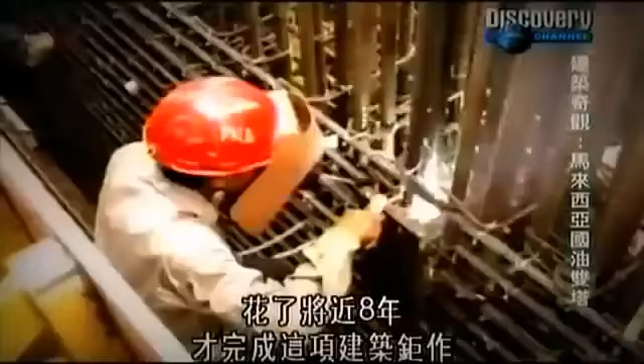Kuala Lumpur, capital of Malaysia, home to the world's tallest twin skyscrapers, the Petronas Towers, supported by the world's deepest foundation, spanned by the world's highest sky bridge. Over $1 billion worth of concrete, steel and glass went into their epic construction that took almost 8 years. The Petronas Towers are not only marvels of engineering, they're uniquely Malaysian icons for the 21st century.

Malaysia is a bustling melting pot of races and religions. 25 million Malays, Indians, Chinese, and other ethnicities live side by side in a predominantly Islamic society. Economic development between the 1980s and 90s has also put the country on the fast track to becoming one of Southeast Asia's tiger economies. One major beneficiary of this prosperous time is Malaysia's capital city, Kuala Lumpur, the heart of the country's industry and commerce.

During this period, the physical landscape of the city transformed. Numerous construction projects emerged, making Kuala Lumpur one of the most built-up capitals in the region. One of my abiding memories of Kuala Lumpur in the 1990s was just the number of cranes on the skyline. I've never seen a city, I think, with so much construction going on. But despite the construction boom, the cityscape still didn't have a focal point, a single identifiable landmark that the world would come to know.

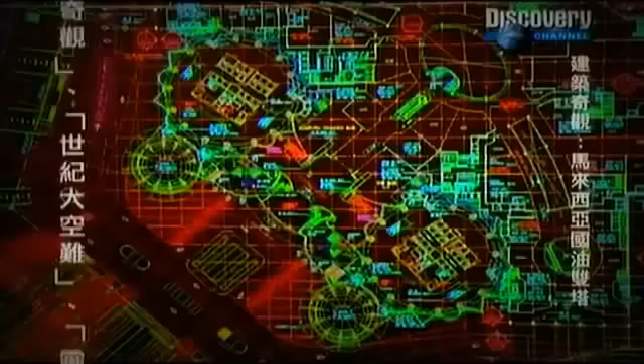The Petronas Towers were supposed to stand out as an ultra-modern icon, but they still had to retain their Malaysian identity and incorporate many of the nation's most identifiable cultural motifs into their design. With this brief in mind, a competition was launched worldwide for top architectural firms to submit design ideas. The winning entry eventually comes from Cesar Pelli, the world-renowned Argentinian architect.

I thought that the request that we connect the building with Malaysia was a very good request. And we explored quite thoroughly Malaysian traditions, Malaysian buildings, Malaysian crafts to capture the essence of what Malaysian means in a building. He took his inspiration from what he saw all around Kuala Lumpur. He reinterpreted the symmetrical patterns of classic Islamic architecture and integrated them into the design of the ultra-modern Twin Towers, as a result bridging the gap between technology and tradition.

A concept he used to further emphasize the towers' presence as a gateway. In the brief, we were requested to build 2 towers to form a gateway. Most of the other competitors did towers of varying sizes. But as I was trying to seek a symbolic quality in these towers, I quickly realized that having them in a pair, symmetrically placed, the symbolic value of those towers strongly increased.

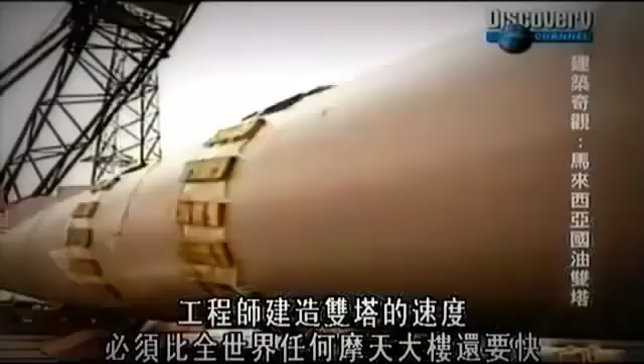With design decided upon, the engineering team was given a deadline of only 3 years to complete the construction of the Petronas towers. It was an ambitious timeline, and to achieve it, they'd have to build the towers faster than any skyscraper construction anywhere in the world. Even more challenging, the Malaysian builders had no prior experience constructing a super skyscraper.

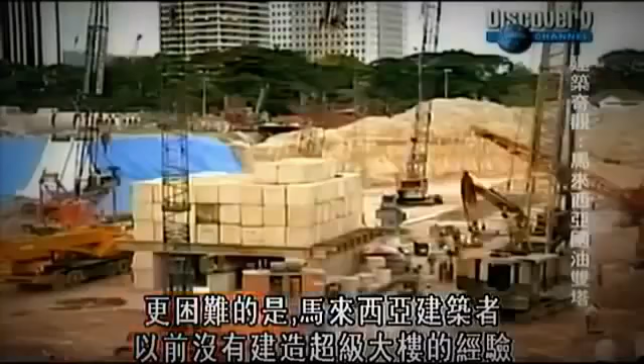To top it off, one more challenge was thrown to the design and engineering teams. The question was actually asked by then the Prime Minister, Tun Dr. Mahathir, what would make it the tallest building in the world? And Pelli thought about it and he said, you probably add another 10 meters or so. And we were struck by the point that that's all that it would take to make it the tallest building. And yes, okay, so make it so.

Suddenly, the Malaysians were not only faced with building a mega skyscraper for the first time, they were also about to construct the world's tallest buildings. Today, Malaysia's capital, Kuala Lumpur, is identified by an iconic landmark, the Petronas Towers. People from all over come to see the world's tallest twin skyscrapers.

But as much as the Petronas Towers stand out internationally, they're also able to blend into their Malaysian surroundings. This is the result of a strict brief given to Argentinian architect Cesar Pelli. Pelli's design adapts the geometric shapes of Islamic architecture found all around Kuala Lumpur and reinterprets classical Islamic patterns.

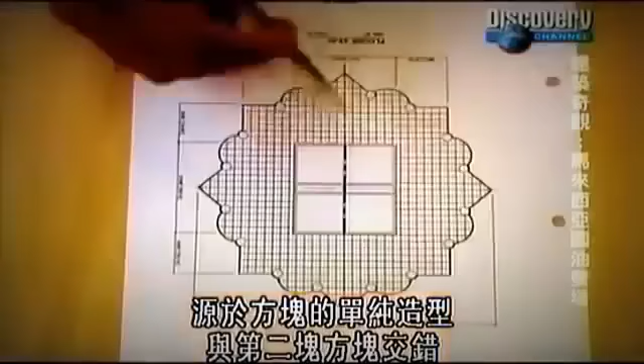Two interlocking squares form the 8-pointed star shape of the tower's floor plate, an important motif in Islamic art that symbolizes unity and strength. This interlocking of the squares has played very importantly in the form of the floor plate of the tower. Now it's based on a simple geometric form of a square, and interlocked with a second square, and this forms the basic geometric form of Islamic geometry.

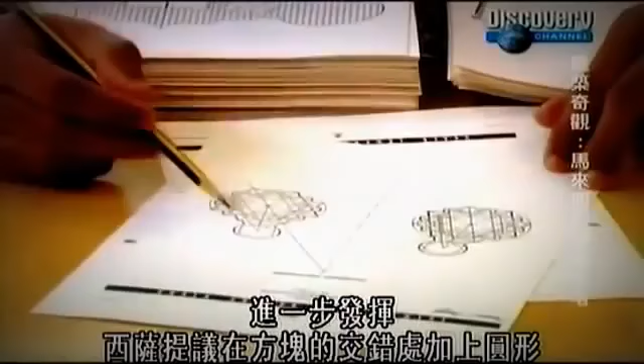But the floor plate design has a fundamental problem. Its interlocking squares limit the usable floor space in the building. A solution is quickly found. We slowly changed it by adding 8 semicircular lobes into a 16-lobed star. This is now a very efficient floor plate. To explain this further, Cesar proposed that at the intersections of these squares, he proposed circulars, and that's how the floor plate got projected out, and we have a sharp edge, a rounded edge, a sharp corner, a rounded corner.

The major design issues may have been resolved, but the bigger challenge remained. How do you build the tallest skyscrapers in the world? Back in the 1990s, the country's tallest building was a mere 60 stories. Constructing a skyscraper at a record-breaking 88 stories would be a tall order for Malaysia. There was a lack of experts with the depth of experience needed for a project of this scale.

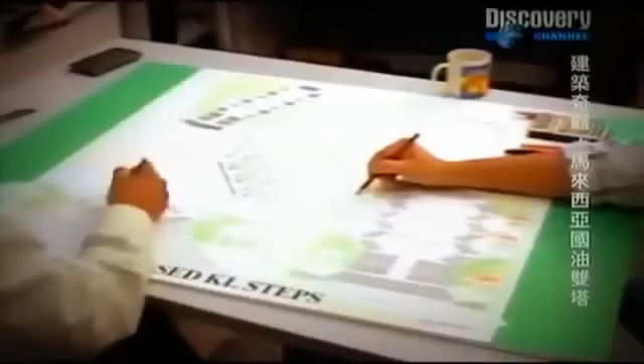A multinational team was quickly assembled, the likes of which had never been seen in Malaysia before. And this was very much a multinational effort. We had the English, we had the Scots, we had the Americans, we had the Canadians, we had the Japanese, we had the Koreans, we had the Chinese. You know, almost every single country was represented in one form or another. So it wasn't just a local effort.

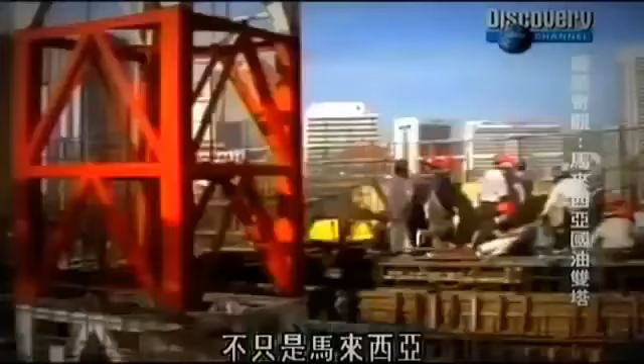The engineers' first task is to figure out what material to build the Petronas towers with. Skyscrapers are usually built with steel, but steel is not only an expensive material, it's something Malaysia is short of and also unfamiliar with. Now, if these towers were constructed in America or in Japan, they definitely would have been steel structures. To build the towers this tall, using mostly steel, would have blown the budget sky high. The solution was to go with the one material the Malaysian construction industry had in abundance: concrete.

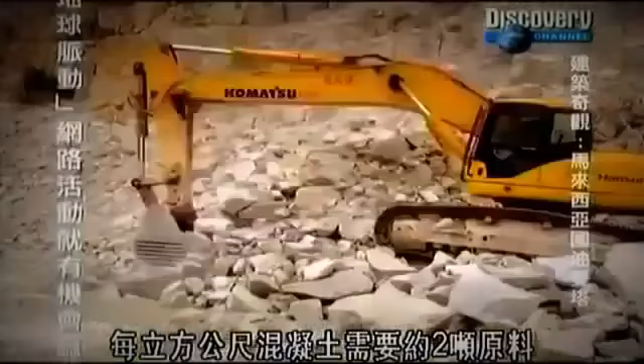Chris Landry is a concrete supplier who knows very well what the challenges are with using this material. The Twin Towers took approximately 180,000 metres of concrete. That's a fair volume of concrete in any structure. Every metre of concrete uses approximately 2 tonnes of material, and we were pouring 24 hours a day, so you can just imagine the volume of material that was going through the actual site.

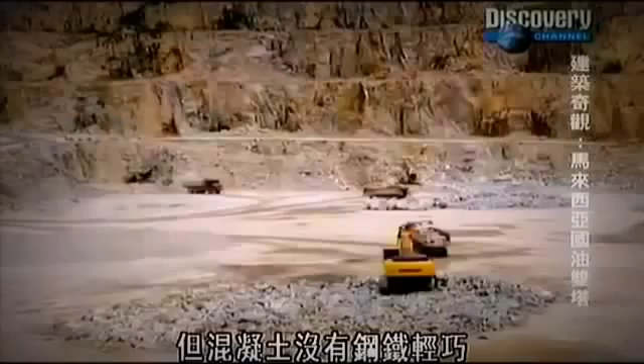Concrete, the world's most common construction material. A building made of it can resist strong winds and absorb twice as much vibration as that of steel. But concrete isn't as light as steel. Using it would make the Petronas towers the heaviest structure on Malaysian soil.

The combined weight of the towers reaches a staggering 600,000 metric tons, the equivalent of almost 4,000 jumbo jets. Needless to say, their tremendous weight also meant tremendous pressure on the ground beneath. We are talking about loads, mega loads. Here we have each tower's loads which are close to about 300,000 metric tons. So under such loads, with such mega building, we would need a huge and a large foundation to carry this building.

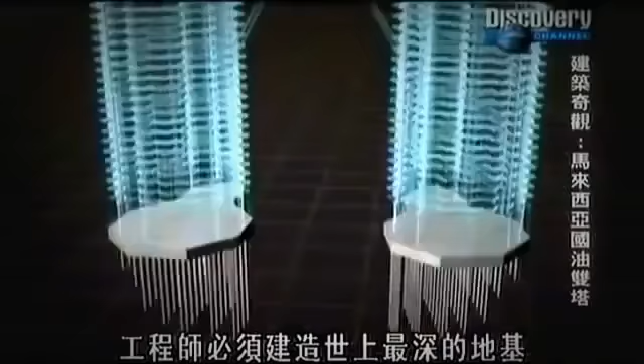To cope with the crushing pressure generated by the weight of the tallest towers in the world, engineers realized they'd have to plan and build the world's deepest foundation. Kuala Lumpur sits in the Klang Valley, a flat alluvial land surrounded by limestone hills. But while the valley's floor appears to be a smooth and unchallenging landscape, what's underneath can be as erratic as the limestone outcrops that encircle it. Building the world's deepest foundation on such unpredictable ground would be easier said than done.

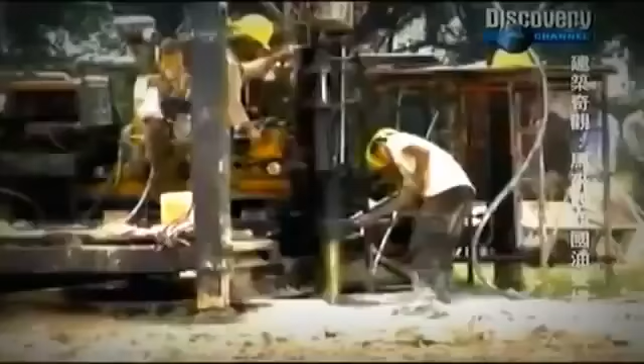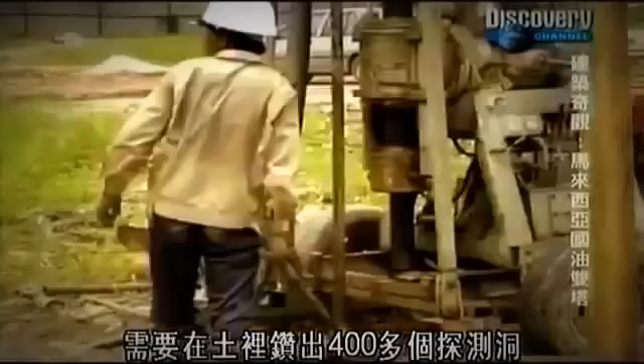Before building the massive foundation, the geotechnical profile of soil conditions at the site will have to be studied. This involves drilling over 400 exploratory boreholes into the earth. Stephen Tong was the structural engineer on the ground whose task was to examine the test results. To his dismay, his worst fears came true. The location sits on the edge of a cliff. Being a tower of this height, you know that the stresses underneath the soil are tremendous, and sitting on a cliff means that it causes tilt on the tower.

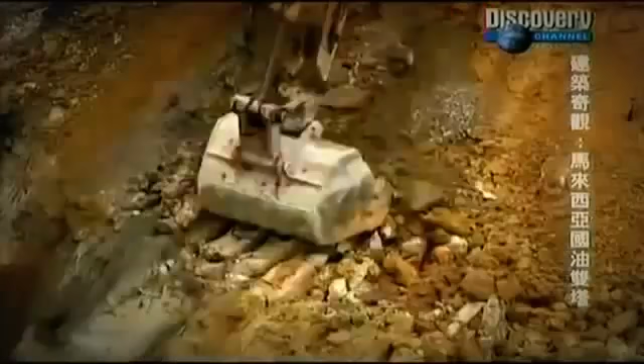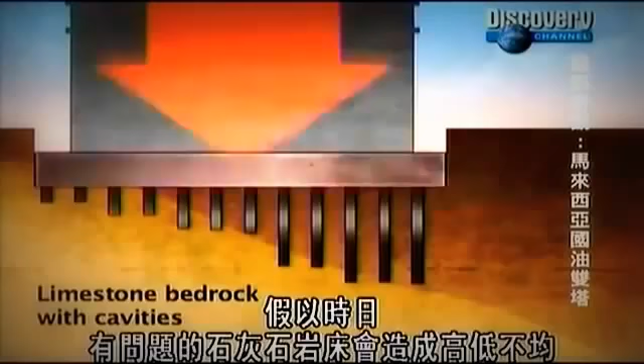The underground cliff that the towers are to sit on is limestone bedrock that starts shallow but slopes steeply downwards, more than 180 meters. Normally, limestone is good soil and it's rock. It provides a good end bearing for foundation. But in this case, the limestones have cavities in it, and that poses a soil problem. Over time, the problematic limestone bedrock can result in unevenness and cause the towers to tilt dangerously.

The engineers broaden their investigation around the site. They discover stable terrain 60 meters away from the original location. By moving the site to the new location, the towers avoid problematic bedrock and anchor firmly on stable soil. A massive concrete raft will now be constructed and laid across steel pilings, drilled some 125 meters into the ground. The foundation system of these buildings is actually a combination of pile raft foundation. Piling meaning deep columns penetrating into the soil, and the raft capping all these columns.

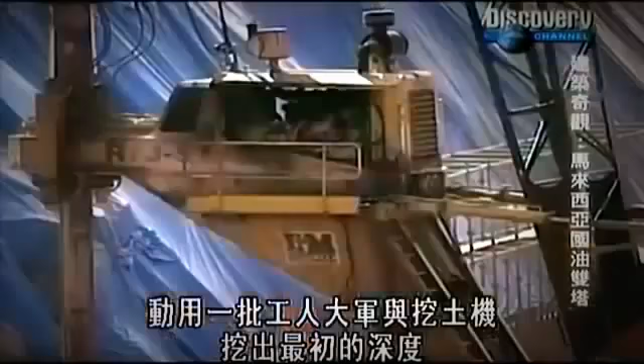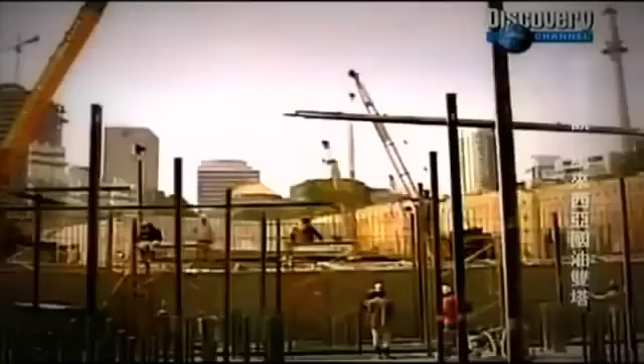To prepare the ground for the foundation, an army of builders and digging machines are brought in to excavate the initial depth. Even a large underground stream is no match for these diggers. Powerful water pumps are used to turn the stream into a mere puddle. Pilings are driven firmly into the ground to form the skeleton of the foundation. To fill the 4.5 meter thick foundation skeleton, over 13,000 cubic meters of concrete is required, the same volume as 5 Olympic-sized swimming pools.

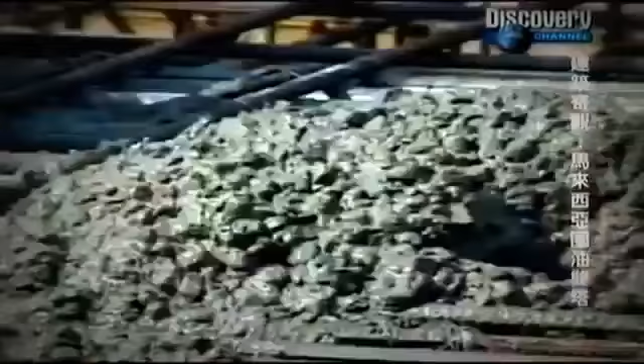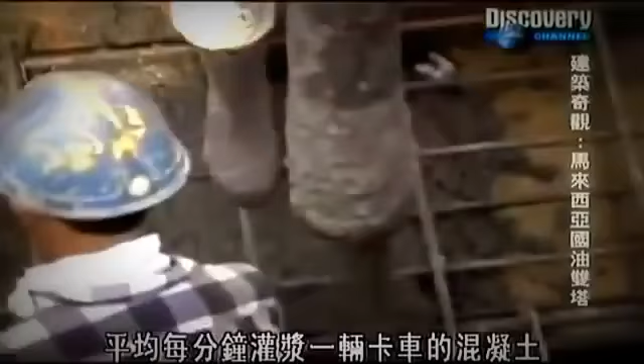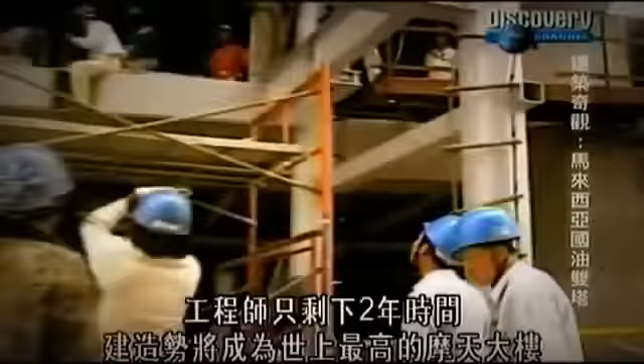The quick-drying nature of concrete meant that any delay could ruin the entire pour. So the team sets a punishing pace, pouring an average of 1 truckload of concrete every single minute. The pouring goes like clockwork from day to night. Not even a strong tropical storm can stop the men from continuing their work. After 1 year of planning and building, the massive foundation was finally ready to support the heavy loads of the Petronas towers. There's no time to waste. Engineers had just 2 years left to build the towers that would become the tallest skyscrapers in the world. There would be no room for mistakes.

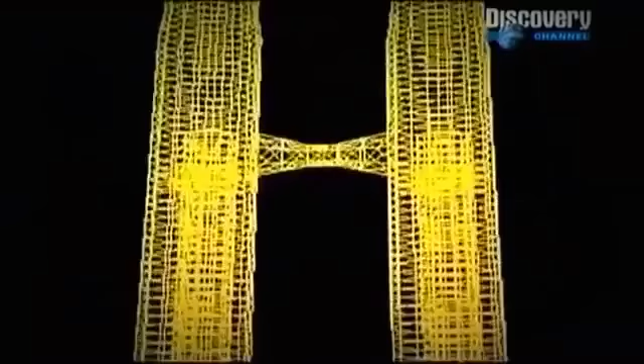Among the most distinctive features of the Petronas towers are the pinnacles. Twin spires that form the apex of Kuala Lumpur's famous landmark. They stand 452 meters above the Earth's surface, crowning the world's tallest twin towers. The idea of wanting to have the form of the building extend itself as much as you can into the sky, I think it's a basic human impulse. It's the desire, perhaps, of trying to connect our earthly beings with something higher in the sky.

Today, the Petronas towers provide an effortless view of the Kuala Lumpur landscape. But 10 years ago, taking the towers to their record-breaking height was not so easy.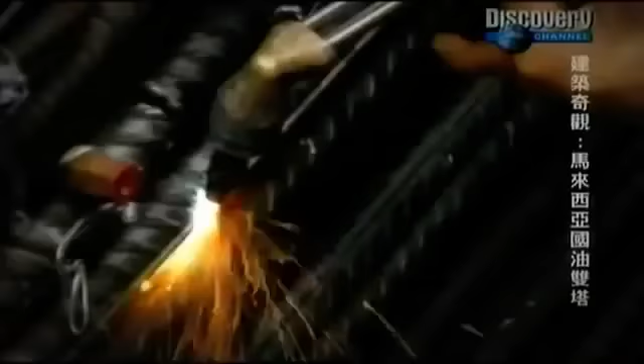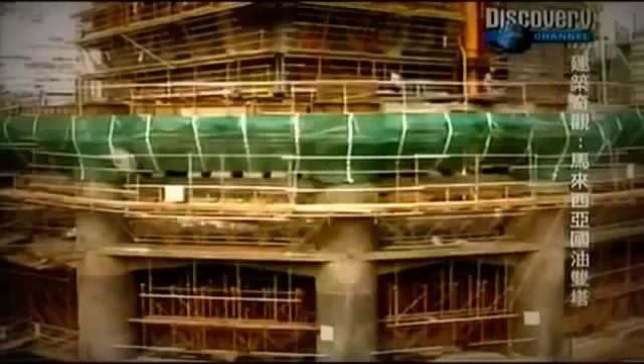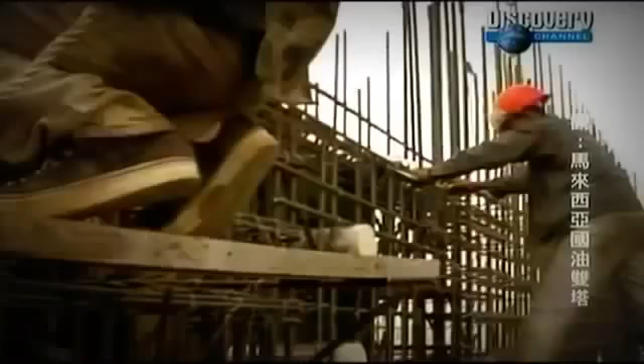During the construction of the towers, building each floor of the 88-story skyscraper was back-breaking work with no margin for error. As the Petronas towers began to take shape, engineers had to maintain the tower's verticality. This means keeping the building straight as it climbs to the top. A deviation of even millimeters can cause the skyscraper to lean.

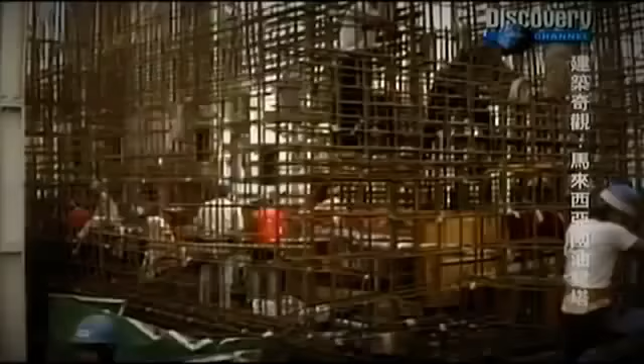Building crews were also in the race against time. They had only 2 years to complete the construction of both towers. To meet this tight deadline, planning managers realized they had to build one floor of the Petronas towers every 4 days. We were looking at a 4-day cycle per floor, and that is very, very fast. Even today, that is still among the highest rate of construction in any of the tall buildings anywhere around the world.

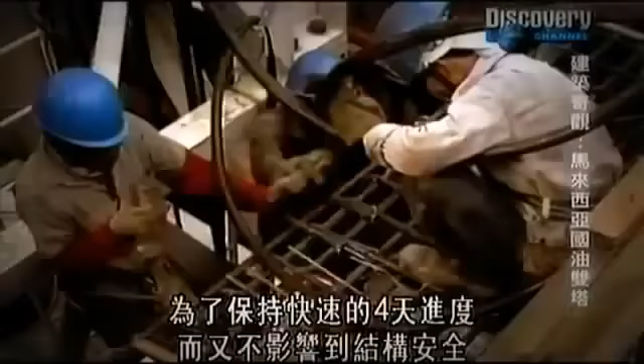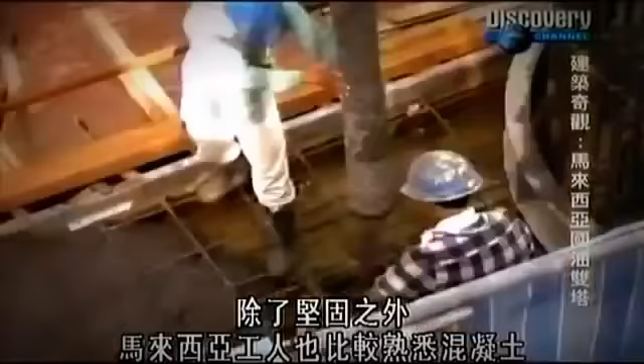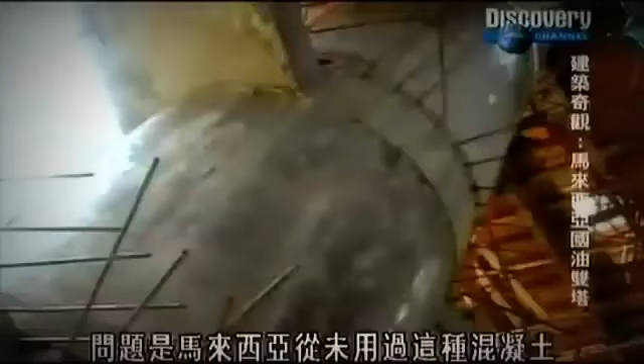To maintain the rapid 4-day cycle without compromising the integrity of the structure, engineers decide to use concrete. Besides its strength, builders in Malaysia were more familiar with concrete and worked faster with it. But using ordinary concrete to construct tower columns 452 meters high would result in massive column sizes and affect the building's design. So high-strength, more compact concrete was needed to streamline the columns. The problem was, this type of concrete had never been used in Malaysia before.

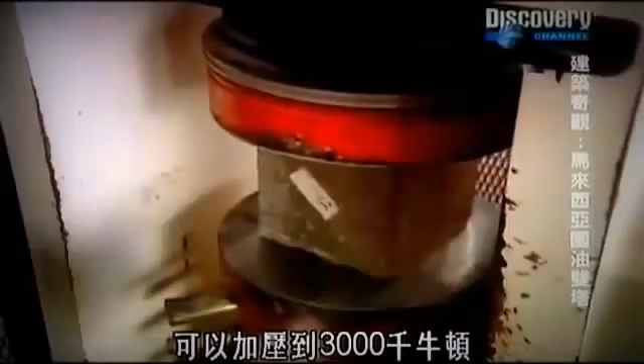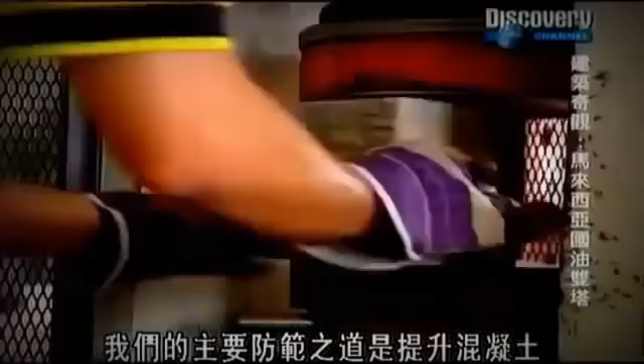Engineers brought in high-strength concrete experts, like Simon Jeffrey, to push the concrete mix to unprecedented strength levels. Here's our compression machine. This machine can compress up to 3,000 kilonewtons. When we're dealing with skyscrapers, we have zero margin for error. How we guard against it, our primary guard is we over-design our mix. For example, the grade 80 that we supplied to the towers, the average strength achieved was 101 megapascals. That's 25% stronger than what the engineers stipulated.

The grade 80 high-strength concrete is so strong, it's able to withstand the combined weight of 500 elephants for every square foot. The engineers were now not only able to build really fast, but also create a concrete monolith stronger than most skyscrapers. But the outer cosmetic beauty of a skyscraper is just as important as its inner strength.

Besides trying to build the tallest skyscrapers in the world, the Malaysians wanted to build one of the most beautiful buildings in the world. But beautifying giant skyscrapers is no easy task. It would involve using over 80,000 square meters of steel to add another unique feature to the towers. These are the only 2 towers in the world which are cladded in stainless steel, completely. The stainless steel is a beautiful material in the sense it captures light in different ways at different times of the day.

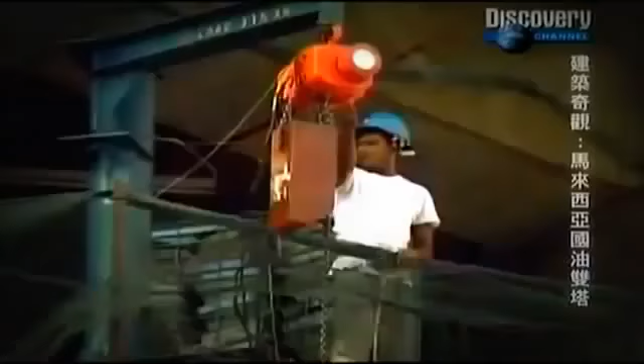The shimmering beauty of the Petronas towers today can be attributed to the efforts of hundreds of metal workers who clad her armor of stainless steel. In order to match the 4-day per floor cycle of tower building, they had to devise a special process that involved prefabricating a unique wall panel system. The man behind the metalworks company responsible for knocking these wall panels into shape is Mr. Cha T. In just 2 years, Cha T and his team would have had to cut and assemble a total of 33,000 panels, installing 120 of them into the towers each day.

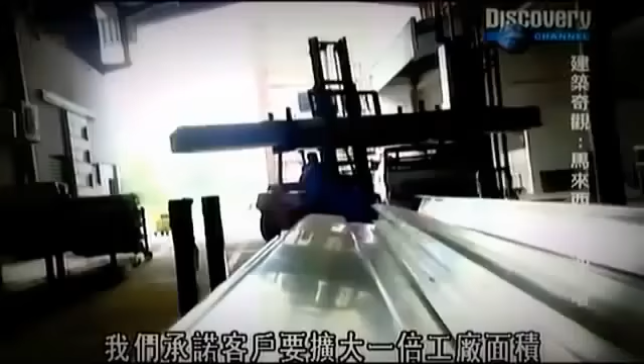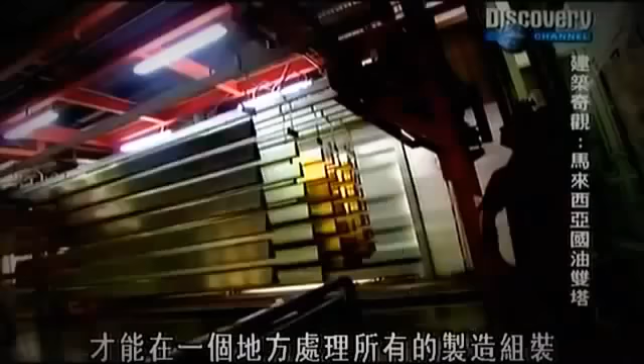When we got the contract in 1993, we have a factory area of about 75,000 square feet. This is our commitment to the client to expand our factory, to double it, so that we can cater all the manufacturing and assembling activities in one area. It was the largest amount of stainless steel that Cha T ever had to work with. He quickly realized that to cut the panels accurately in the given amount of time, he would need reinforcements.

This is the V-cut machine from Japan. A power cutter that combines the sharpness of a samurai sword with Japanese precision technology. We need the V-cut machine to V-cut all the corner, all the bend corner, you know, so to give you a very sharp look.

The steel claddings may owe their clean curves to the latest in Japanese technology, but the idea behind them stems from a more artistic source. They are a result of architect Cesar Pelli's plan to reflect the changing light of the Malaysian tropical climate in the tower's design. We wanted to capture some of the feeling of a tropical building, some of the sense of exuberance and the richer play of light and shadow, the kind of dappled light that you have in the rainforest.

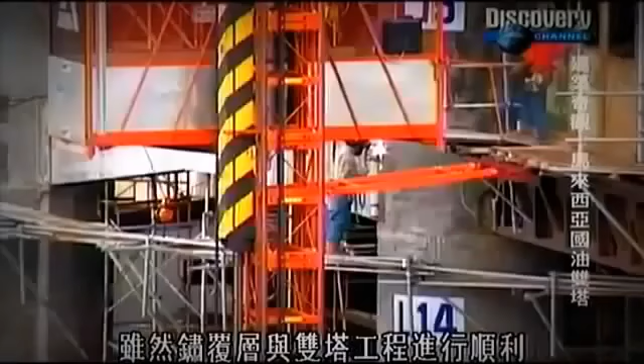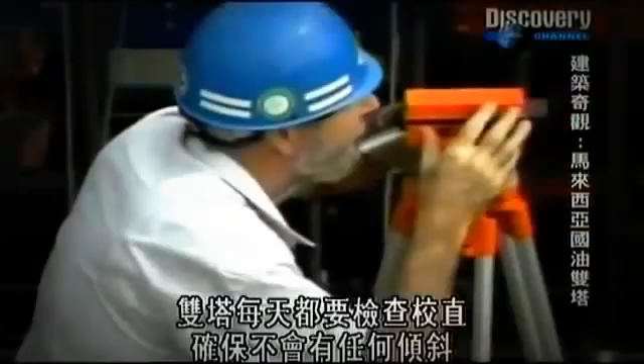Even though the steel cladding and tower construction are running smoothly, engineers still face the challenge of ensuring the building remains as straight as an arrow while going up. The alignment of the buildings is checked every day to ensure it doesn't sway from the direction of its upward climb. Everything seems to go smoothly, but as the towers reach the 40th floor, the engineers are struck with their worst nightmare.

One of the towers is discovered to be leaning a few millimeters off tangent, and no one understands why this is happening. This is a major cause for concern. Because to us, millimeters, if you don't correct the millimeters, could translate to centimeters and to meters. I was afraid. We have a tilting tower in KL. I was afraid of that. With the leaning tower now looking like a potential disaster, all work on the building stops until a solution can be found.

As general manager, P. Krishnasamy was in charge of monitoring progress reports from surveyors and engineers. I think at that time, because we didn't understand it, it became a bit of a scare for a lot of people, because we'd never been there. We then went to people who had built it before, at Sears in Chicago, and they picked it up very fast to tell us, this is what will happen and the reasons why that happened.

The solution the Malaysians discovered was to generate a stronger opposing lean to cancel out the current leaning problem. During construction, we would overcorrect the building in the opposite direction. We will build it such that if it were to lean in one direction, when we overcorrect it, end of the day, it comes to the correct verticality. Ironically, to fix a crooked skyscraper, engineers have to make the building equally crooked, but in the opposite direction. Fortunately, the deviation was small, and the correction required was minimum.

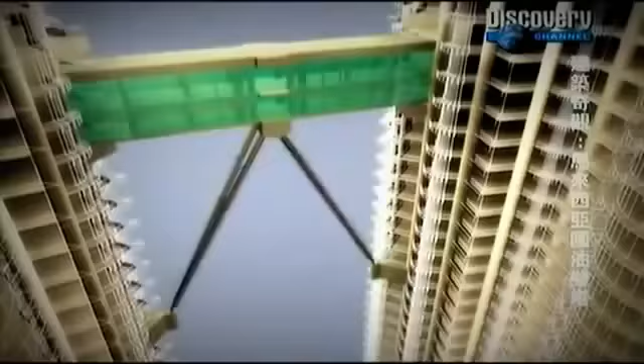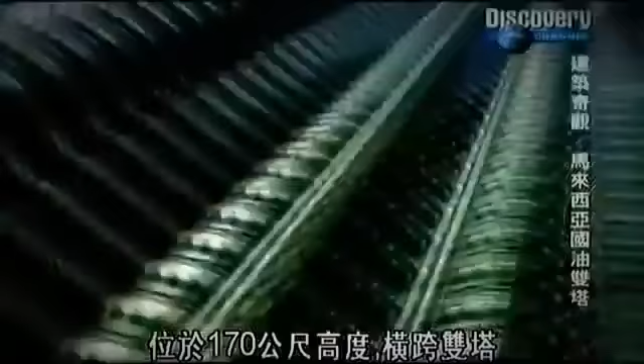Today, the sky bridge is the centerpiece of the national landmark and one of the main reasons why the Petronas towers are unique. The idea for the sky bridge started as an aesthetic, artistic intention with a symbolic meaning. Connecting them with a bridge made them more clearly into a portal to the infinite, a portal to the sky. Besides serving a symbolic purpose, the sky bridge also has a functional role.

Gentlemen, you're given 10 minutes on the bridge.

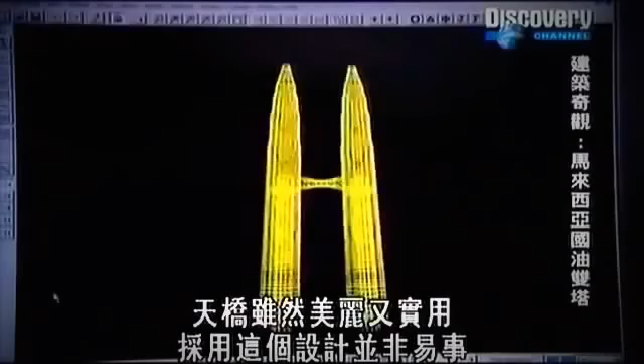It serves as a corridor connecting the two towers. To manage the flow of traffic, designers also made it a dual-level bridge. People can get from one building to the next at midway without having to travel down the length of the tallest towers in the world for the same purpose. Though the Sky Bridge brings with it form and functionality, incorporating it into the Petronas towers did not come easy. Even at the design phase, the bridge proved to be a major challenge.

The Sky Bridge design went through a number of stages of redesign. It, I think, went through 5 different stages of design. At the launch of the project, the Sky Bridge had a little bit of a spider web kind of a feel to it. The original design had a series of steel wires locking the bridge to the towers. This was based on the theory that they helped to create stability. But when structural engineers studied the design more closely, they discovered the theory was flawed.

We were faced with a problem here from a technical point of view, the movement. We know it is a fact that both towers could move differently. Now, when both towers move apart, we know that if we fix the bridge to the towers, there will be tearing forces. The original web-like design of the Sky Bridge had to be discarded. Designers and engineers then looked into other potential replacements before settling on a new plan. The solution was to float the bridge.

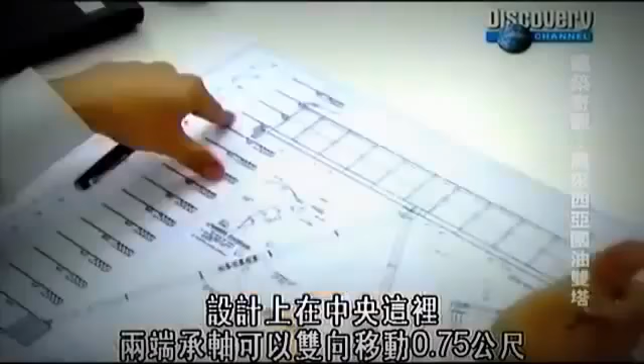It involved building an inverted V-shaped arch that supports the bridge in the center. 2 end bearings accommodate any movements caused by the natural tendency of the towers to sway. In fact, the design is that at each of these bearings, the bridge is allowed to move 3/4 of a meter in either direction of the center. That is what I meant by floating. It is not fixed.

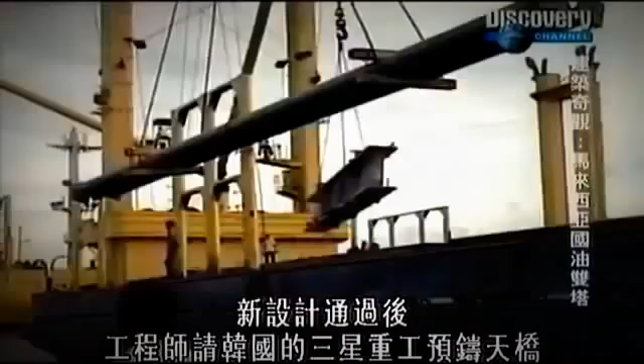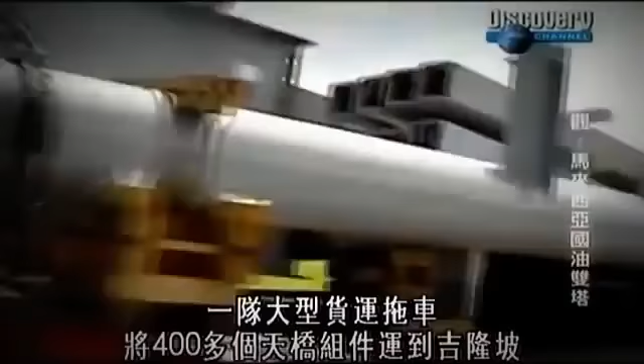With the new design approved, engineers had Korean steel experts, Samsung Heavy Industries, prefabricate the Sky Bridge and ship it over to Malaysia. It was important to make sure that every single element of the Sky Bridge had to be perfect. A convoy of large trailer trucks transport over 400 bridge parts through Kuala Lumpur. But this is nothing when compared to the bigger challenge that awaits them on site.

Raising the main parts of the Sky Bridge to more than 100 meters above ground and then assembling them in mid-air. Since it's going to be constructed in the mid-air, we can't afford to make any mistakes. If you have any slight mistakes, you can't do anything with it, you know. So you have to make sure that it's right the first time.

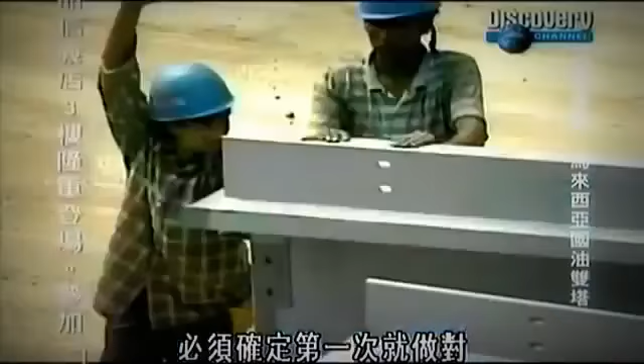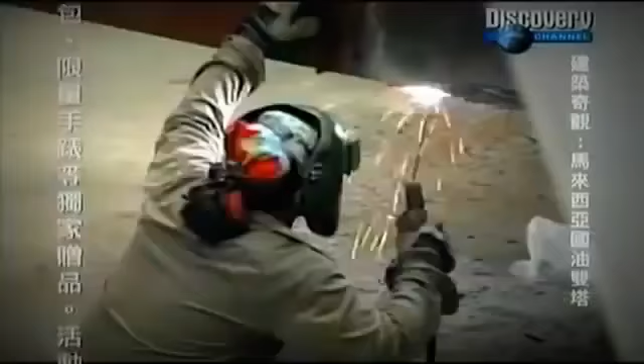On arrival, the bridge parts, weighing in at more than 400 tons, are carefully removed from the trucks. The Sky Bridge is reassembled into 5 sections, comprising the 2 40-meter-long legs, the 2 ends of the bridge, and its midsection. In no time, the lifting operation commences.

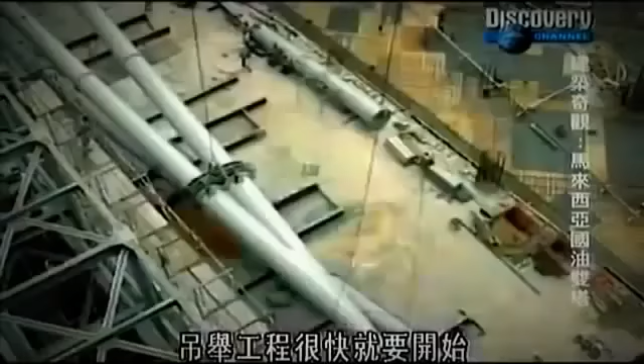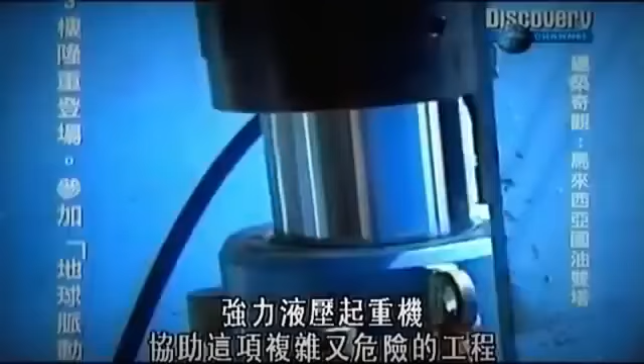The process begins with the lifting of the bridge's legs that each weigh 60 tons. Powerful hydraulic jacks help to ease a complex and dangerous operation. Each leg is slowly maneuvered into a vertical position over their permanent bearings at level 29 and secured. With this part of the process completed, lifting crews turn their attention to the bigger challenge of the operation.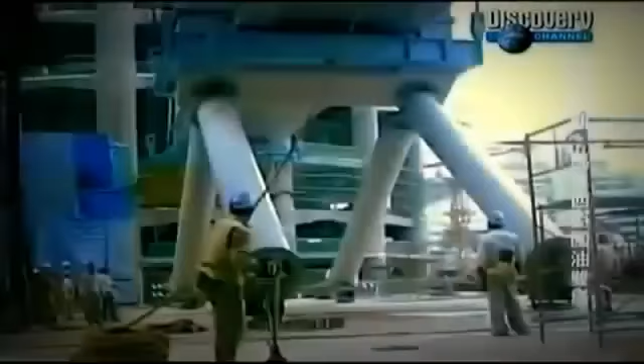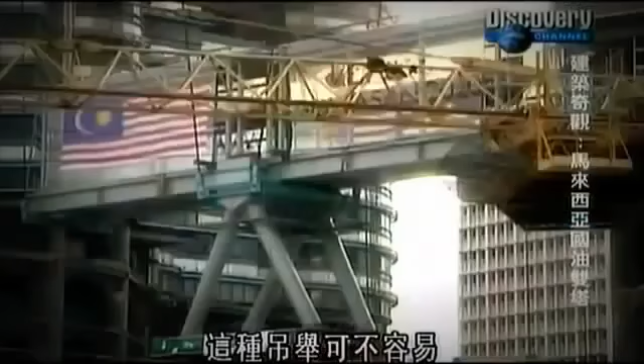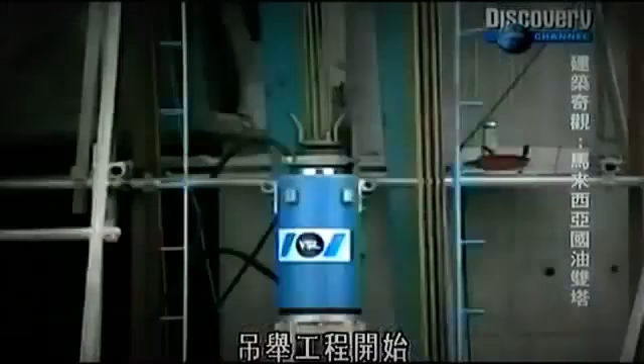Lifting the 325-ton bridge midsection. This will not be an easy climb. The lifting operation begins. The midsection makes the ascent slowly at 12 meters an hour. Engineers carefully observe each second of the process. In an operation that will take more than 30 hours to execute, anything can happen.

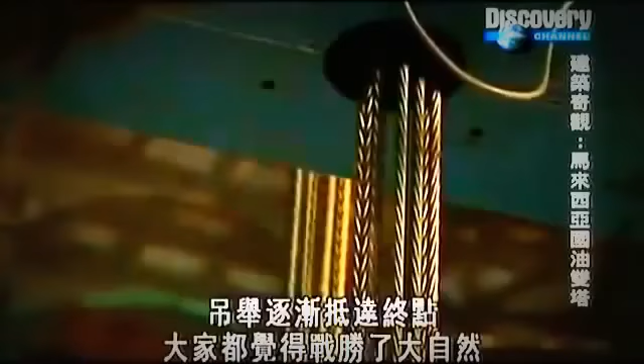Sure enough, it does. A tropical storm suddenly erupts over Kuala Lumpur. But there was no way the engineers could stop the bridge midway through its ascent. So the lifting continues. As the lifting draws closer to the end, everyone thinks they got the better of Mother Nature. Until the lifting mechanism of the bridge section stops without warning.

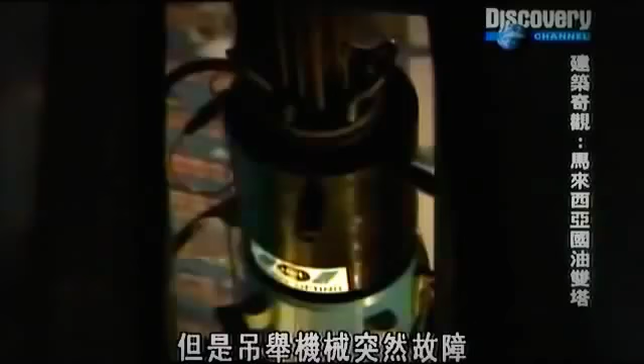What happened was the computers that were used to lift up the sky bridge got struck by lightning, and the whole process actually stops. And they had to actually repair it almost overnight. We can't leave the midsection dangling there, not knowing what's going to happen next. So I think everybody was actually praying. That was the sleepless nights. I used to sleep most of the time, but that was one time that I didn't sleep at night.

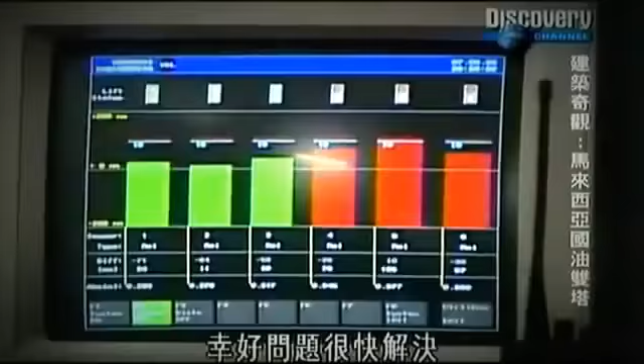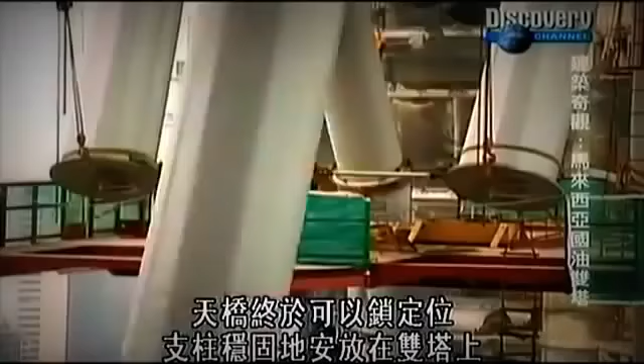To everyone's relief, the problem is quickly resolved, and the bridge continues its ascent to reach its intended height. After almost 3 days of painstaking lifting work, the bridge finally gets bolted into place, with its legs resting firmly on both towers. The goal of building the highest sky bridge in the world has finally been realized.

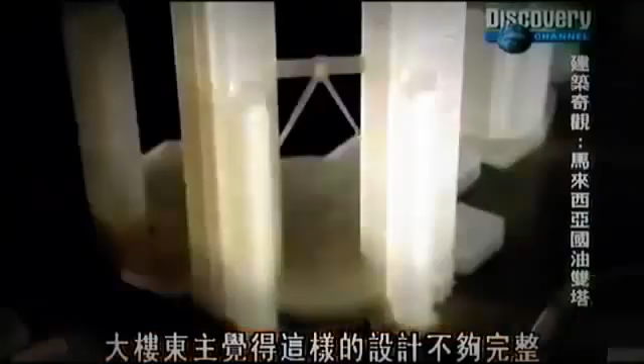With the sky bridge now in place, engineers turn their attention to another defining feature of the towers, the pinnacles. It's hard to believe that these elegant structures, so comfortably perched on the top of the tallest twin towers in the world, were never in the original plan of the buildings. In the original submission by Pelli, the roof or the top of the building was a flat roof. So it seemed abrupt. To the owners, it seemed an abrupt ending, or rather an abrupt crown to the building.

It seems incomplete. So Mr. Pelli was asked to come back with several options. It was a very difficult element to design. We had more alternatives for the pinnacles than for any other element of the tower. It was just how to capture the right quality, the right flavor for the pinnacles.

The design solution came, once again, from the earlier connection Pelli made with Islamic art and culture to create the look of the Petronas towers. This time, he looked closely at the curved beauty of the domes on mosques all over the city and decided to adapt their design for the tower's pinnacles. It's a very subtle intellectual relationship, but somehow it is felt, and people feel it, connect with it, and can sense that this is a form that connects with their culture, connects with Islam, connects with Malaysia.

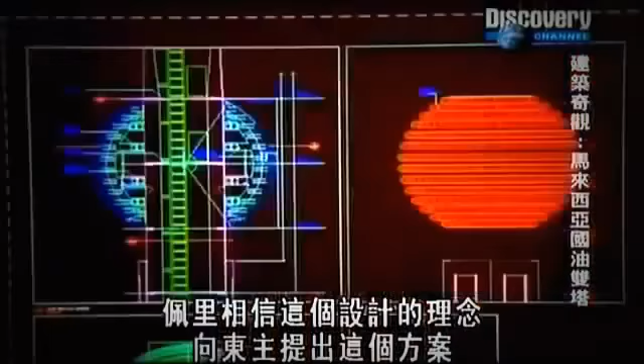Convinced by the reasoning behind this design, Pelli pitched the idea to the building's owners. Everyone was sold on the idea, but it was more than just the unique design that appealed to them. With the pinnacle, it essentially pushed this building to become the tallest building then. It would have gone up 452 meters, making it slightly taller than the then tallest building in the world, which was Sears Tower. So it's almost by accident, but it was created because of a need statement, which said that there was something incomplete in the design.

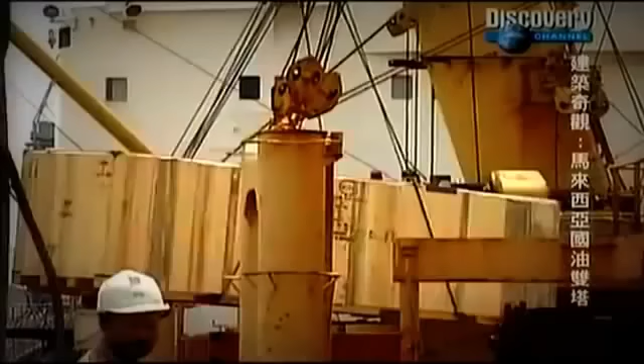Without the pinnacles, the Petronas Towers would rise to 379 meters. Adding the pinnacles meant an additional 73 meters in height. It's like adding another 20 stories to the towers. After Pelli's design was approved, the prefabricated parts of the pinnacles arrived from Japan. Each 176-ton pinnacle is split into different segments and transported carefully to the building site.

Erecting the steel mast of the pinnacle was a masterstroke during an installation that took 3 full days. Engineers lifted the parts to the 83rd floor and, with the help of a hydrojacking system, raised each segment of the mast bit by bit through an opening in the roof. We did it like a Lego set, you know, you put the pinnacle there and then the next bit and the next bit and the next bit, and then we hydraulically jacked it up. That was my favorite part, getting it to that and becoming the tallest. And we did that about 3 a.m. in the morning.

Though the method of constructing the pinnacles was hidden from view, the results can now be seen in their full glory for miles around. For designer Cesar Pelli, raising the pinnacles represented not just the inventiveness of engineering, but is also symbolic of the aspiration of mankind. They carry your eye to the top, and it allows your eye to continue to the sky, to heaven.

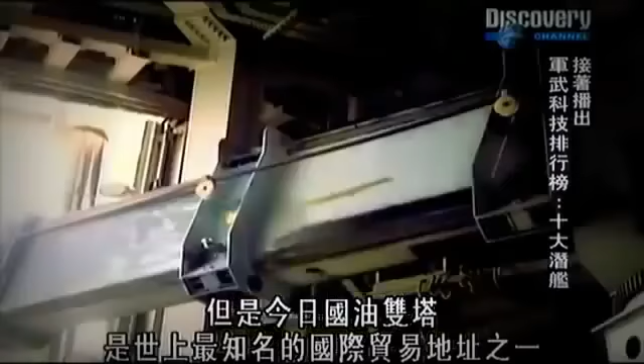It took more than 8 years of planning and construction, but today the Petronas Towers are one of the most sought-after international business addresses in the world. They have become the national icon of Malaysia and have established a true sense of a city centre for Kuala Lumpur that did not previously exist. But this national icon is far from an idle monument. As the thriving hub of the city centre, the Petronas Towers have over 10,000 occupants from all over the world, demanding the highest standards of safety and comfort.

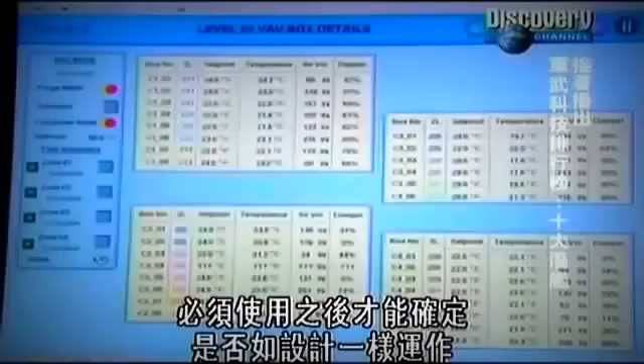From day one, Abdul Hadi has been the man overseeing the building operations of the towers. The biggest challenge here is the safety of our 10,000 people within this building. With any new building with new equipment, new installation, you don't know exactly how the system is going to behave. You have to run it to make sure that they work as per design.

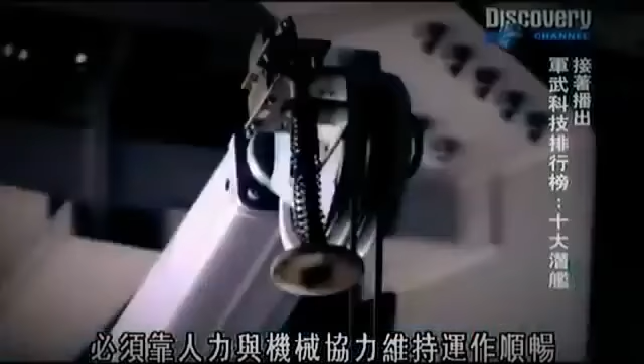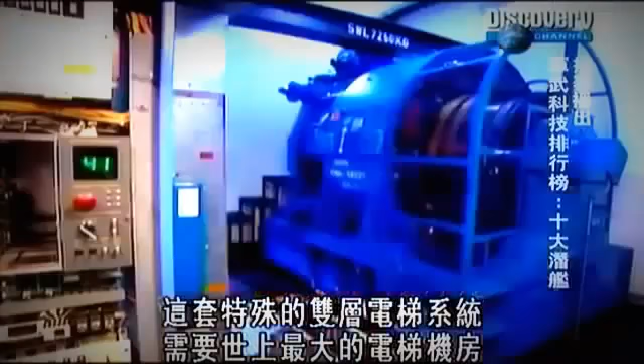To keep the towers operating at the highest international standards, the combined efforts of humans and machines are needed to make it run like clockwork. And doing this properly requires working round the clock. Even though the exterior cleaning operations run every day, it still takes the team almost 6 months just to complete one cleaning cycle. But it takes less than 60 seconds in the tower's unique high-speed lifts to get people safely up and down over 80 stories. It's a one-of-a-kind double-decker lift system that requires the biggest lift machine rooms in the world.

But to truly be an icon, sometimes feats of engineering are not enough. If the super lifts are its heartbeat, then a 2,600 square meter, 850-seat concert hall represents the soul of the building. My favorite part of this building is the concert hall. Why? To have a concert hall in an office building created immediately a recognition of the human needs.

The developers recognized the need for life around the towers early on. Finishing touches, like a 40-acre public park, would forever ensure the towers' special place in the city. The building in itself is special, but the additions, which were not tangibly really part of the towers, but created the space, I think made it extra special.

What the Petronas Towers have done is they have brought the sense of symbolism, the sense of romance that a skyscraper can have. I think they have become classic skyscrapers on a par with the Chrysler Building or the Empire State Building. And as such, they have captured the imagination of people all over the world.